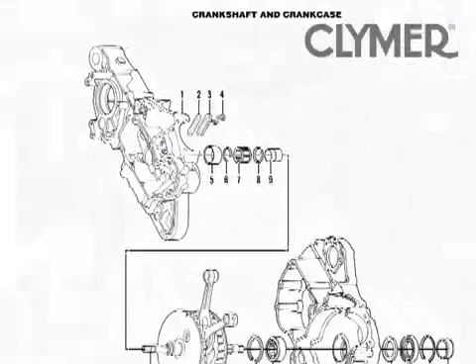The Sportster features a 45-degree V-twin pushrod engine featuring all the Harley mystique and a one-of-a-kind sound and feel. Since 1957, the engine has continually evolved, with the big change coming in '86 with the Evolution engine. The Evo replaced the original Ironhead engine design and uses one cam per overhead valve, resulting in 4 individual single-lobed gear-driven camshafts. 1200 conversions are relatively common with a factory-offered kit.

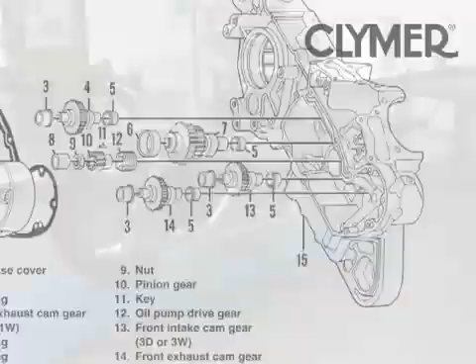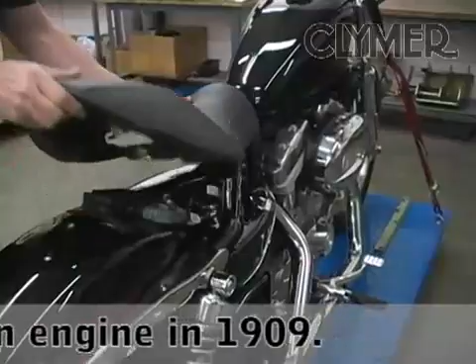And to the dismay of many a Harley purist, in all their traditional old-school philosophy, the '07 model was equipped with the dreaded EFI. Yeah, that's electronic fuel injection. Like left side shifters, drive belts instead of chains, and oh mighty god, electric starters that work, times do roll on in Milwaukee.

The other big change for Sportsters over the years came in '04 when the engine was rubber mounted. A vain attempt, and I mean vain, at eliminating some, and I mean some, of the engine vibration. Hey, they vibrate, come on!

Kind of like going to a UFC cage fight between Liddell and Rampage Jackson, and then complaining about the violence afterwards. Oh, they vibrate. The engine and transmission share a common case.

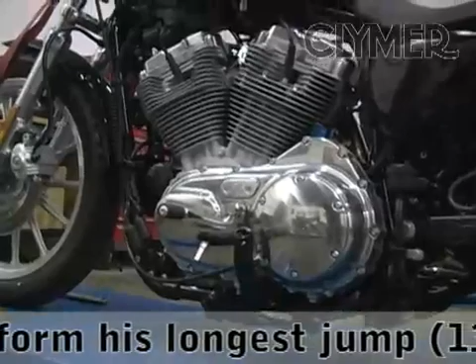This motorcycle has a 5-speed transmission. 5-speed trannies were introduced in 1991. Talk about old school.

The traditional look of the Sportster has remained basically the same since the '58 XLCH model. This model was the first to feature the now iconic peanut tank. The '57 models took most of their cues from the previous K model.

The next big styling cue is the staggered shorty pipes with mufflers. Every Sporty since '62 except for the '79 model year, which featured a dual exhaust, has rolled off the line with this pipe configuration. All Sportsters use a dual piston, single caliper front disc brake.

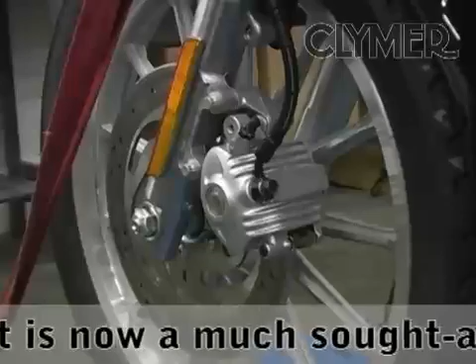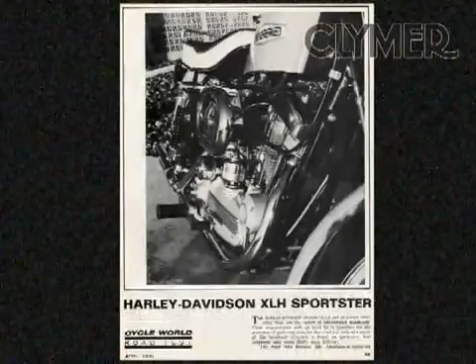Stopping at the rear is provided by a single piston, single caliper unit. So although the Sportster is no longer the fastest bike on the block and certainly doesn't feature the most high-tech goodies, it remains a motorcycle icon that has evolved into the definition of a traditional standard.

Let's hit the road and see how 50+ years of motorcycling tradition feels.

With an amazing 50+ year production history, the Sportster is in a class with machines such as the Royal Enfield Bullet, Vespa scooters, Honda Cub, Chevy Silverado, VW Beetle, Porsche 911, and Jeeps.

This model is the L, or low, with shortened forks and shocks, along with a redesigned solo seat. On the L, this is marketed for women, although the Iron and Nightster have the same spec, in those cases, marketed as aggressive and chopper-like. Nothing like a little marketing spin.

Other features that set the L apart are the wider and longer handlebars, making the reach to the grips and controls shorter.